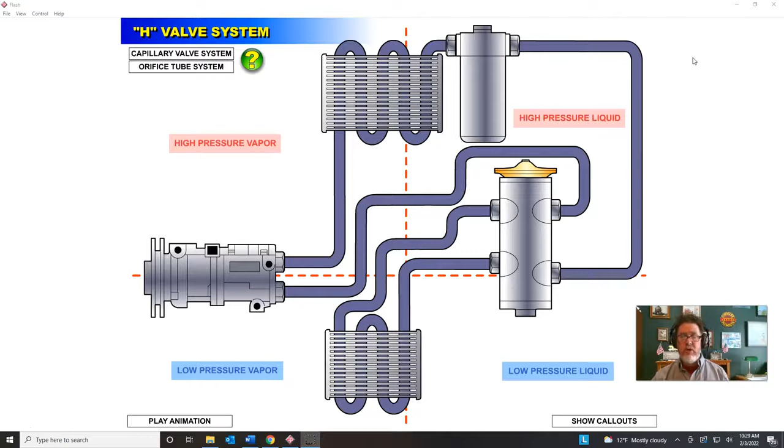This one is going to highlight H-valve systems. When we look at an H-valve, this is still a TXV system, a thermal expansion valve system. They started going to an H-valve instead of a capillary tube because everything is built into what they call an H-valve. If you look at the lines going in, you have your liquid line going in, liquid line going out, and your suction line going in, suction line going out, and it kind of looks like an H. That's why they call it an H-valve.

This H-valve could be, typically it's on the bulkhead, and you can usually see it. Sometimes it's facing straight up and down, sometimes sideways, but typically you only see half of this. You see the side where the suction line is going to the compressor and the liquid line is going to the receiver dryer. You do not see the other half because that's under the dash, so you only see half this valve from the bulkhead.

This power dome is the key because sometimes this aluminum block is just a connection between the suction line and the liquid line to the two lines at the evaporator. The way to tell the difference between if it's just an attachment block versus the H-valve is, again, you look at this power dome. If you see that power dome, yep, that's my H-valve.

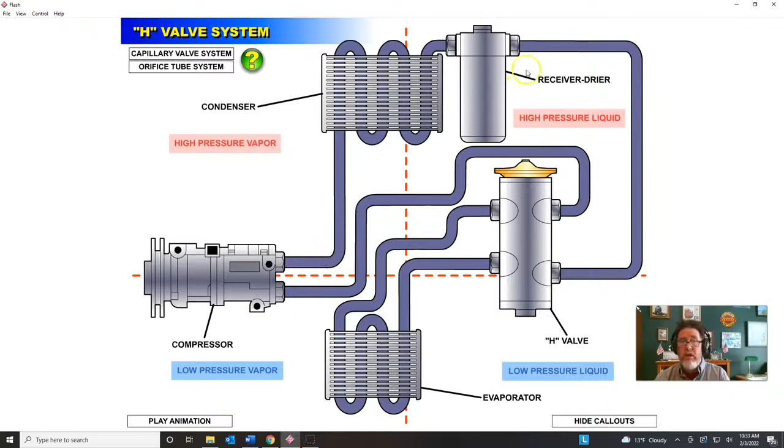So you have three main lines: you have your suction line that you can see, your discharge line that you can see, and your liquid line that you can see. I'll play the animation so you can see the refrigerant going through everything, but remember that the discharge line should be hot to the touch, and the liquid line, where there's a liquid high pressure refrigerant, should be warm to the touch.

Then if you grab this suction line right there, that should be cold to the touch.

So how this system works, different from a capillary system, is that everything is kind of built into the H-valve itself. So you still have your power dome up here on top, and you have refrigerant on the very top of that power dome.

That refrigerant is going to depend upon what the pressure is, or the temperature. If the pressure is high, if the temperature is high in that power dome, then this pin inside here is going to push down, and as it pushes down, it's going to open up that valve and allow more refrigerant to go through. If the pressure on the top of this power dome is low, below 20 psi, well, there's not as much pressure pushing down on it, and this spring at the very bottom is calibrated, and there's typically a cap at the bottom of your H-valve that seals that.

If I ever see that cap off, I'm very concerned. Somebody took that off and maybe tried to tweak a screw in here to try to change the pressure, which then changes the way that the H-valves work. So yeah, don't mess with that screw.

But anyway, if there's less pressure up here, then this spring is going to push up, and it's going to close the valve, kind of like what we see right here. So it's all basically internal.

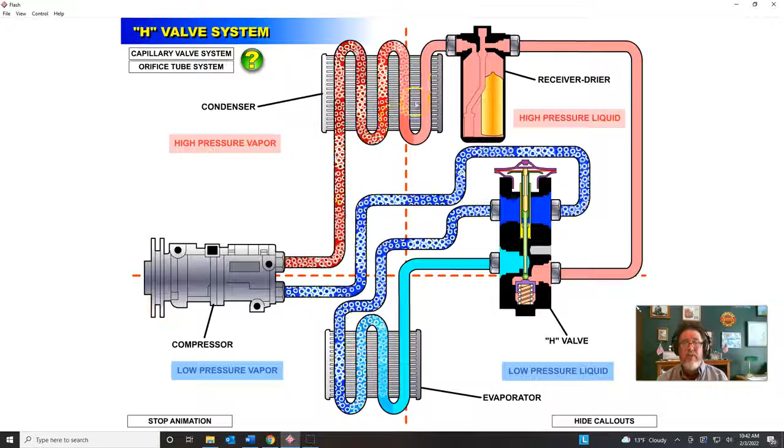So if I buy a compressor at Napa, for example, I want to get their kit. Sometimes it comes with the compressor, receiver dryer, and H-valve all as one assembly, one kit. If I'm working on my car, I may not replace that H-valve until I put the compressor on, get it running, and then do some diagnostics to see if this thing is working or not.

If the H-valve is stuck closed like it is right here, I'm going to get a very low reading on my low side. My low side could even be in a vacuum if it's all the way plugged up and clogged with no refrigerant flow at all.

But if it's restricted and not opening, I see maybe 10 to 15 psi, somewhere below 20. And then my high side is 100 to 150. So it's indicating a problem. What I would do next is...

So that's one scenario, that my pressure readings would indicate if this was stuck closed. Another thing I like to do is run the AC system, then turn it off and watch the equalization pressure, how long it takes the low side and high side to equalize. When I turn my car off, the H-valve wants to go into a closed position like this.

And so equalization will take quite a long time. It may take 10, 15, 20 minutes. If I don't see the pressures equalizing between my low side and high side at all after 30 minutes, there's no equalization. My low side reading is still reading 10 psi, my high side reading is still reading over 100. I'm concerned that there's a restriction in the system.

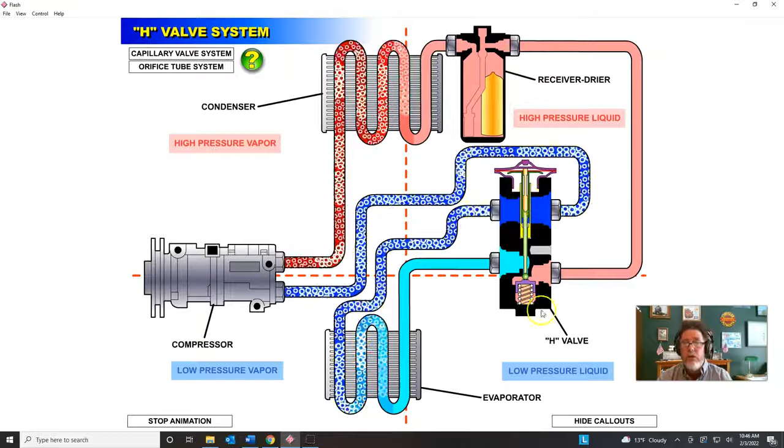Next thing I'm going to do is click on this H-valve to show you guys a little bit more as far as how it operates.

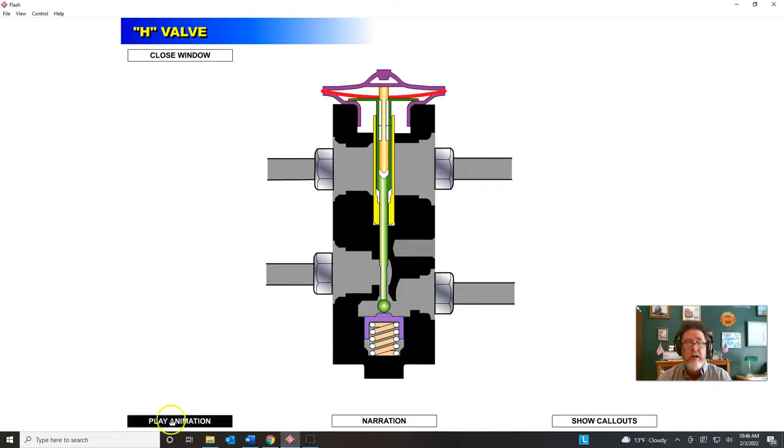So what I tell my students here, let me see, watch how the H-valve is going up and down. So right now it's closed. And then as the power dome goes down, now it's open. So it's just going to go open, close, open, close, open, close.

But what you have to realize, and this is what I tell my students they have to know for their exam, is that when you have a high heat load condition, meaning it's 100 degrees outside, 130 degrees inside your car in the parking lot...

So when you start your AC system, your suction pressure is going to be up high. That means the diaphragm is going to be pushed down, and that's going to operate the pin, which pushes down and opens up the valve because the evaporator could handle it. It's so hot inside your car, you have a high heat load, so all the refrigerant inside the evaporator is going to evaporate. So let's put as much refrigerant as we can in there.

The other scenario is that it's 13 degrees here in Kansas. You have a low heat load, so suction pressure is going to be down way low, typically below 20. The diaphragm is going to be in the up state because there's less transfer of heat to the power dome. The pin's going to move up and the valve is going to close. So on a mild day, on low pressure, the valve closes. It goes up and down, up and down.

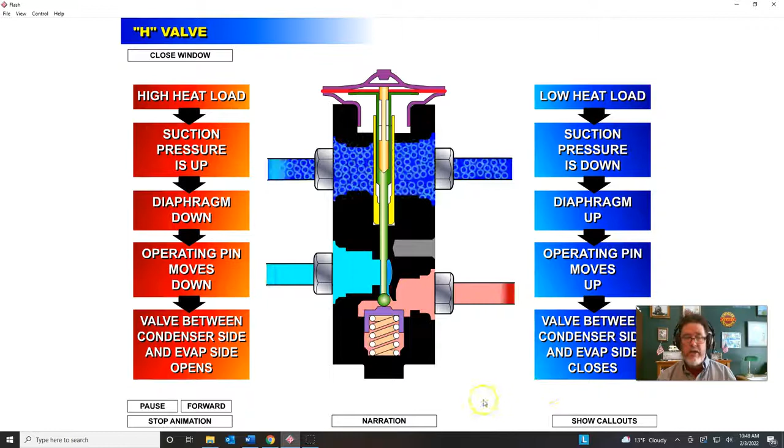This system I have here has, I'll show you the callouts, so you can see the different names of the pieces of the H-valve internally. We have some narration that this guy's going to go through. We're going to listen to it because there's some mistakes they make which I think is kind of interesting, and then I'll explain that. So we're going to listen to what they say. I think it's going to pick it up on our audio, we'll see what happens here.

The H-valve regulates the flow of liquid into the evaporator so that when the refrigerant leaves the evaporator, it is completely vaporized. It's called an H-valve because it has a shape that resembles the letter H. The H-valve consists of a 4-port body, control power dome, pressurized diaphragm, temperature sensing sleeve, operating pin, ball and seat, and spring.

Refrigerant enters the H-valve on the lower port and is regulated through a variable orifice. After expansion, the refrigerant exits the second lower port and enters the evaporator. From the evaporator, the refrigerant re-enters the H-valve through the upper inlet valve port. The refrigerant passes over the temperature sensing sleeve, transferring heat to a small amount of refrigerant within the power dome. The refrigerant expands and contracts based on the temperature of the refrigerant passing through the H-valve. The action of the refrigerant in the sensing cavity modulates the flow of refrigerant into the evaporator.

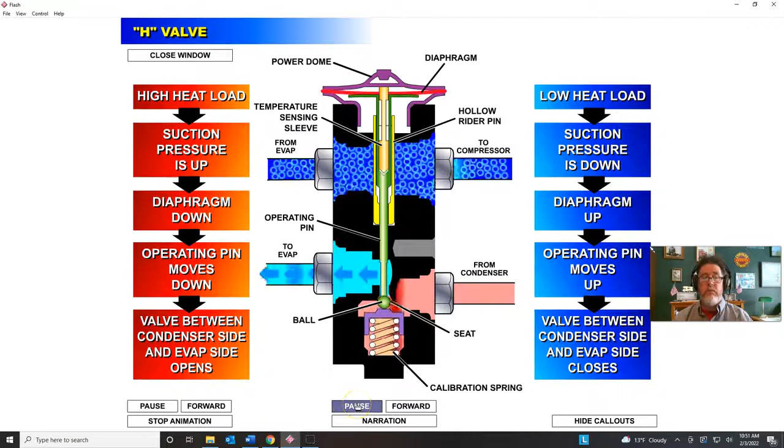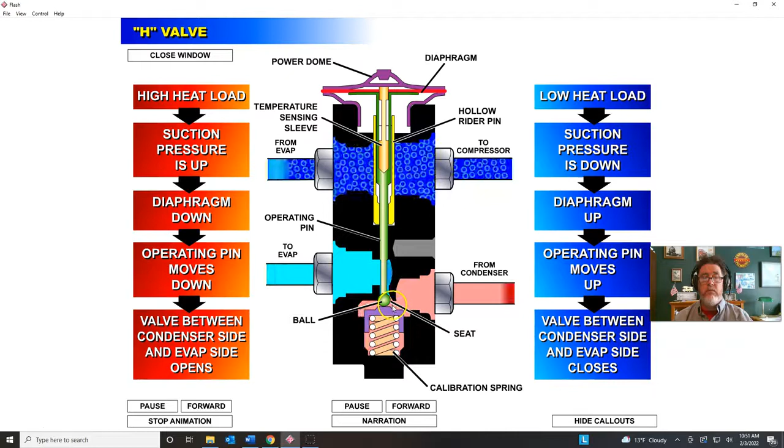Typically, H-valves use a notch on their orifice seat to prevent the ball from completely sealing against the seat and causing excessive high pressure in the event of an H-valve failure, overcharge, or extreme temperature conditions. The notch preventing the ball from completely sealing the valve also keeps oil circulating to the compressor at all times. With some systems, it's important to remember the orifice seat may be designed without a notch.

Okay, so I'm going to try to pause this here for a moment when the seat is closed. So there, it's closed right there. Good. So what they're showing you here is this little notch right here, and some H-valves have a notch and some vehicles do not. It's easy to know which way it is, because when I put CO2 on this power dome and get this to close, if the lowest my low side pressure goes is, let's say 5 psi, and it doesn't go into a vacuum, then I know that there's a notch there.

If I put CO2 on this power dome and my low side drops down into a vacuum, 10, 15 inches of vacuum, and it is creating a vacuum because this is all the way closed, I know that there's no notch.

Another thing I could tell if there's a notch here or not is if I do an equalization test. That's when you turn off the AC system and watch the low pressure and high pressure equalize. If it equalizes in, let's say, 5 to 10 minutes, there's probably a notch there allowing it to equalize a little bit faster. If it takes 20 minutes, longer than normal, then chances are there's no notch.

Now, one thing I thought was interesting is that this animation, this narration, said that this little notch is here to prevent high side pressure from going up high if there's a restriction here. And that is a false statement. If there's a restriction anywhere in here, high pressure will not be high. And I'm very confident on that.

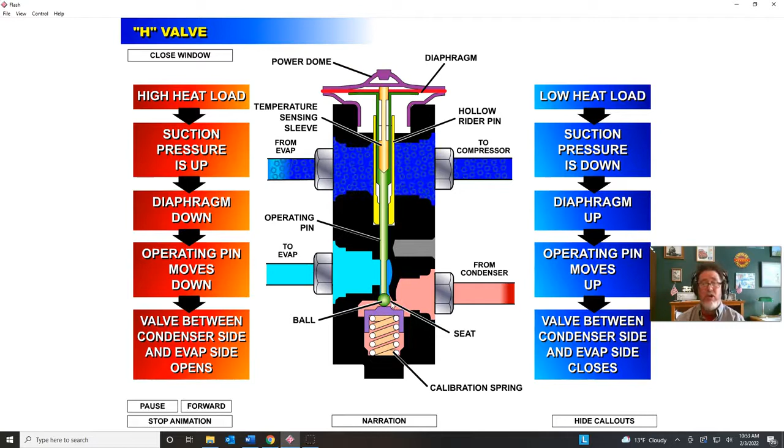Let me explain why that happens. If there's a restriction, I'll play the animation. So if there's a restriction right here in the H valve, I'm going to let the refrigerant go through, and here we'll stop it. It won't let me stop it. Maybe I'll pause it. Let's try that. So here I'm going to simulate a restriction here. Hold on, so it goes here, boom, and it pauses. Okay, so it's all the way closed right there.

So if you take a look at it, what happens is that if the H valve is closed right there, and we create a vacuum in the low side section, we're pulling all the refrigerant out of the low side area. And that suction hose and the amount of volume, think about the size of the evaporator. It's not very big.

Now take a look at the compressor. The compressor is going to take all that volume that was there and put it in the condenser. Think about the condenser -- how much bigger is the condenser versus the evaporator? Also look at where your storage device is. You have storage in that receiver dryer. So what ends up happening is that the amount of area that the refrigerant has to stay in on the high side is a lot bigger than on the low side.

So if there's a restriction, let's say my low side's at 30, my high side's at 150, and I put CO2 on here and get this to physically close, I'll see my low side drop into a vacuum if there's no notch in that seat, and I'll see my high side pressure, if it was 140, maybe drop to 130, but it doesn't go high. It's simply because there's a lot more volume on the high side than there is on the low side -- you suck all the refrigerant out and you can't pressurize anymore, and there's still space over here. Make sure you guys realize that.